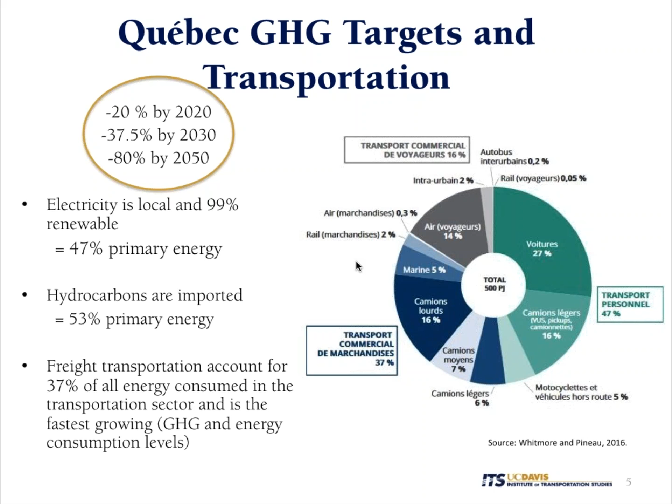So I will briefly give context for natural gas use in transportation, although Joan has done a really good job, so I'll go quick. Both Quebec and California participate in the Western Climate Initiative. Quebec has GHG target reductions in transportation: 20% by 2020, 37.5% by 2030, and 80% by 2050. Freight accounts for 37% of all energy consumed, and as is the case in California, it's one of the biggest growing sectors in terms of GHG emissions. So it makes sense that we try to target transportation, and one option is to use natural gas for vehicles.

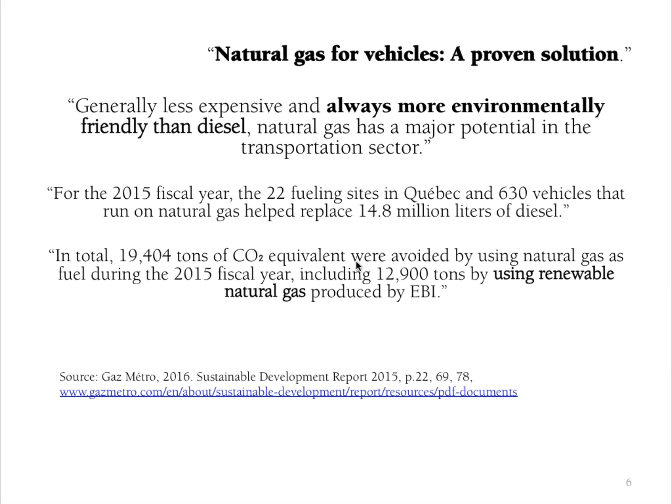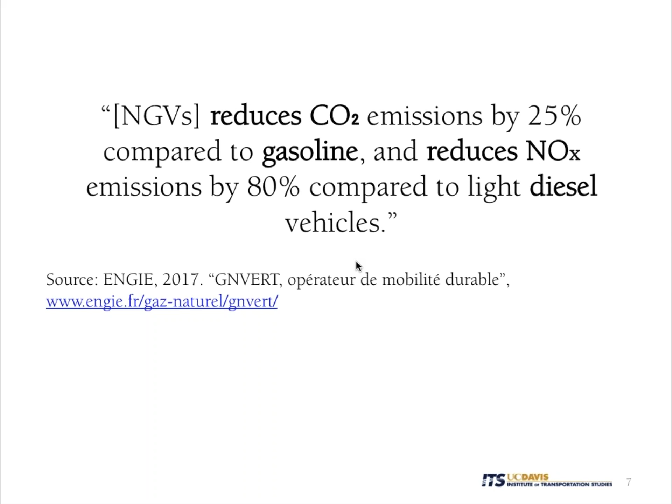I'm going to show some claims that say natural gas is the problem's solution, generally less expensive and always more environmentally friendly than diesel. This is from Gaz Métro's sustainability report, stating that 19,000 tons of CO2 equivalent have been avoided by switching to renewable natural gas. Another claim, this time by ENGIE, a freight operator, states that natural gas vehicles reduce CO2 emissions by 25% compared to gasoline, and reduce NOx emissions by 80% compared to light diesel vehicles. So a couple of things here.

Are we talking about what kind of pollutant here? Are we talking about criteria emissions or GHG emissions? Because they are different, right? Oftentimes natural gas vehicles are touted as near-zero emission vehicles. That's true, but it refers to criteria pollutants only. That means natural gas is indeed low in NOx and PM, and that's why the denomination of near-ZEV, but that refers to criteria pollutants, not GHG.

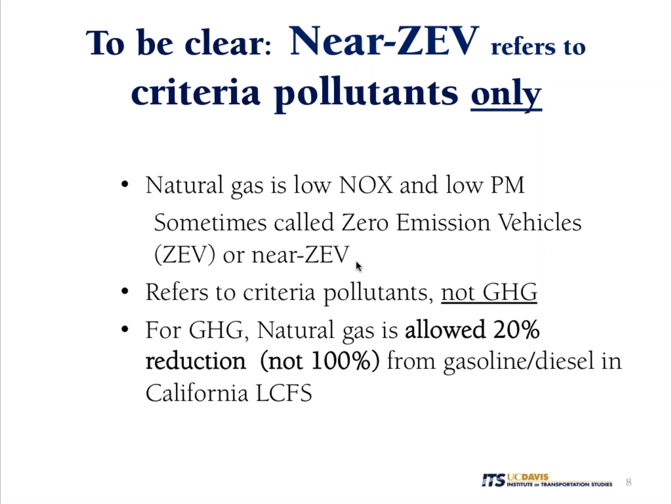Some claims, including LCFS credits in California — low carbon fuel standard credits — claim that natural gas can produce about a 20% reduction from gasoline and diesel. Not 100% reduction, so not a ZEV, but about 20%. That's what we're going to try to evaluate: how true are these claims.

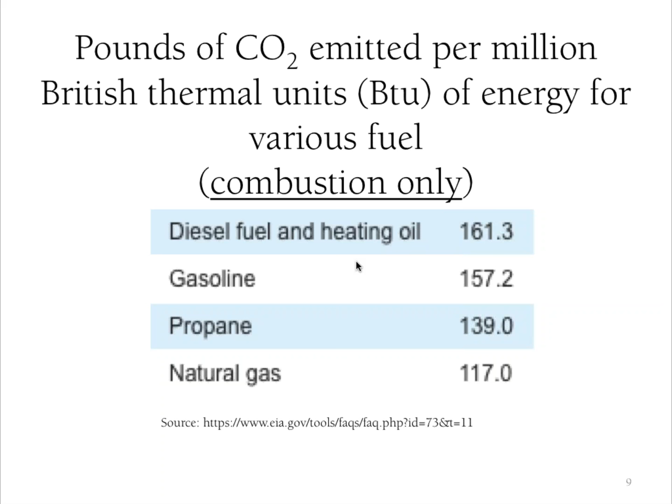When we're looking at emissions from transportation, we look at what's coming out of the engine, out of the vehicle — combustion emissions. Yes, natural gas emits less CO2 per energy produced than diesel, but it's a little more complicated than that. That would only be the emissions from the vehicle. When we're talking about fuel use, we want to see the big picture: what's the life cycle analysis, or what we call the well-to-wheels carbon intensity. The well-to-wheels is defined by each stage, from production of the fuel, refining it, putting it in the pump, then putting it in the vehicle and using it.

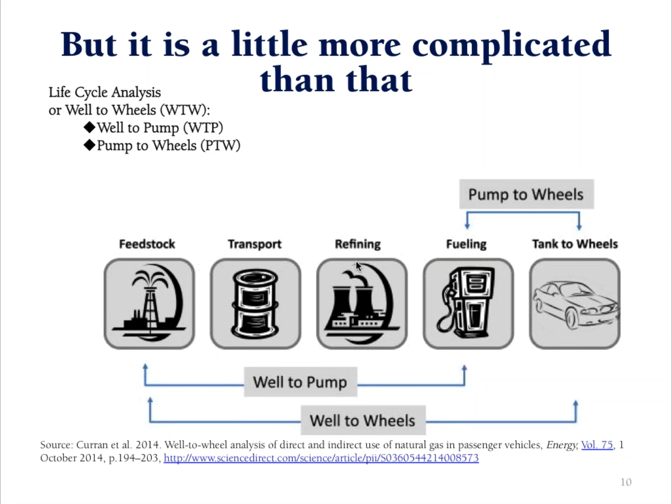We can typically divide the whole life cycle, or well-to-wheels, into the first part, the well-to-pump — sometimes called the fuel cycle — which is what it takes to produce and bring the fuel to the station. Then there's the pump-to-wheels, which is the use part, the end use. For now, I'm just going to focus on the upstream: the well-to-pump, upstream, or fuel cycle of methane, of natural gas, which requires that we look into an important issue — methane leakage.

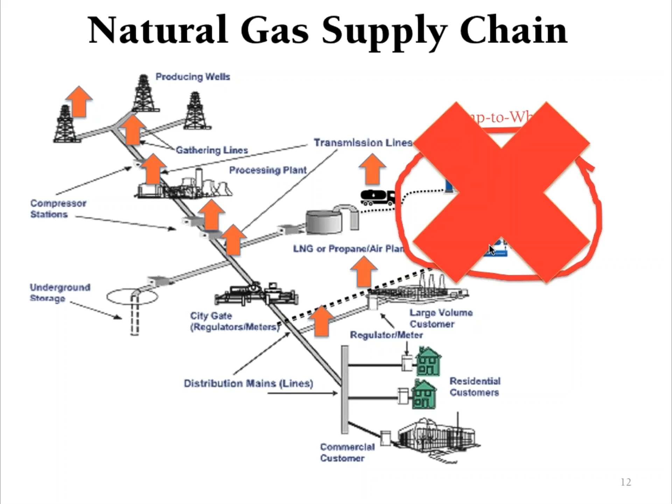So during production we have wells, gathering lines, processing plants, compressor stations and transmission. We have them in the distribution system, in the transport to the stations, and in the stations and vehicles. But I'm not talking about that right now, that's why I'm marking it. I'm talking about the upstream.

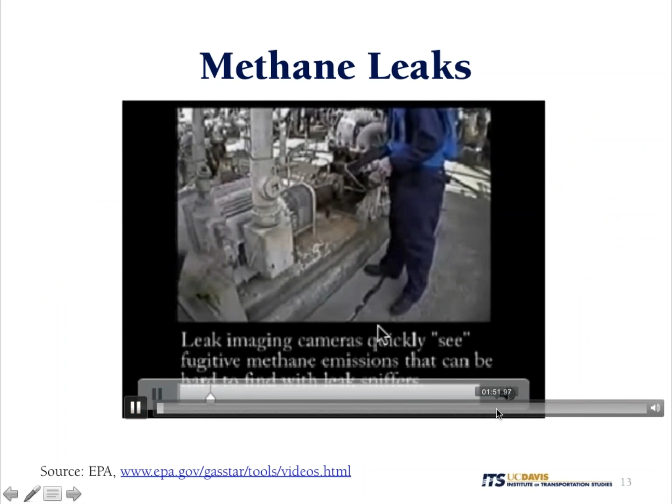I want to show you this video by the EPA looking at methane leaks in the upstream. This uses infrared cameras, and the quality isn't great, but you can see, for example, here marked in the circle, the part that looks normal in the regular camera, and then with an infrared camera you can see that there are leaks. That's how we see the leaks happening.

We have several examples here. We're looking at the joints, and pay attention to how this is a measurement - this is how EPA is measuring the leaks. More processing plant leaks.

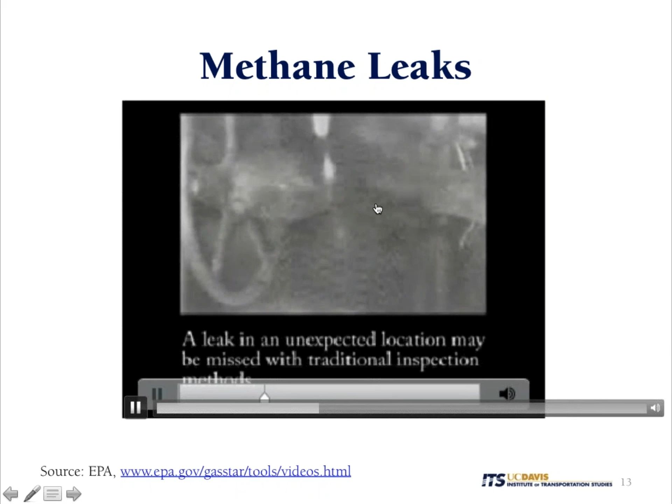We'll see leaks throughout the supply chain. Just bear with me a second. Hopefully you see the black fumes that are normally not visible to the naked eye, and that's happening here in the distribution system. You don't see anything here, and now you see it - that's the same thing with the infrared, right?

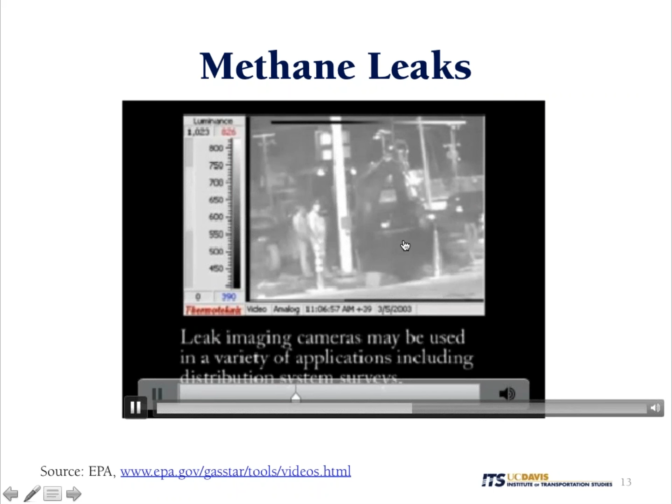So methane leakage is happening even though we don't see it. Another one - a manhole that's open, and then you see all the methane leaking. A road, a pipeline, maybe that's a repair, or we've seen that they leak.

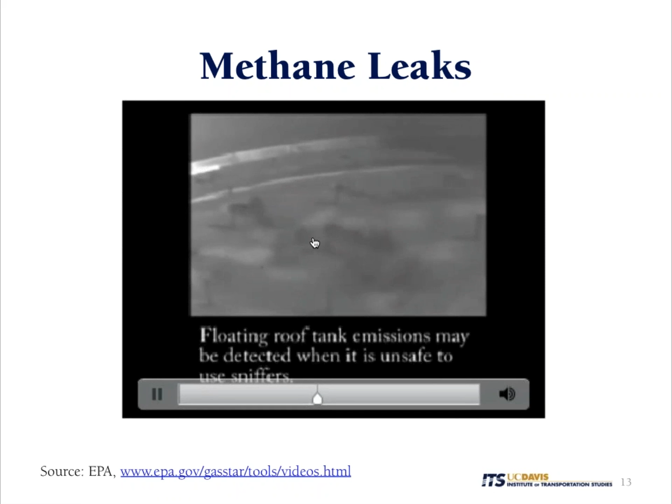This is probably a storage tank. I know it's hard to see, but you can see that there are these leaks coming from the little pipes. We'll see that there is leakage in the pipelines, and that's coming next.

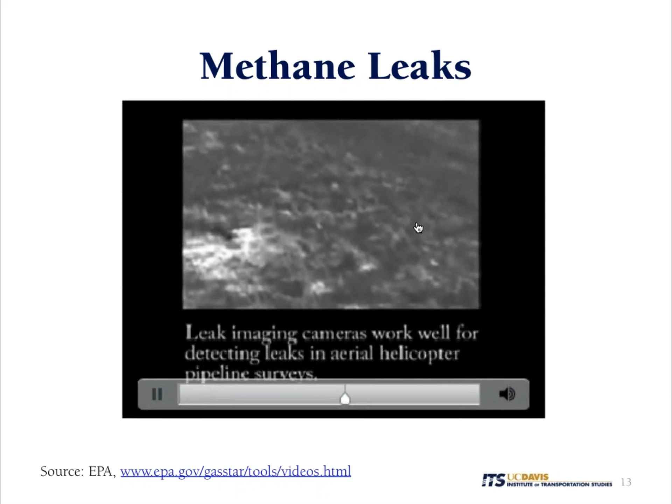This is going to be shown using aerial surveys - basically the same technology, but from the air. So this is pipelines that are leaking. A pipeline that's leaking. An oil production well is leaking too. And then more storage. Point is, there is leakage, even if we don't see it - but we do know it.

The EPA has been monitoring methane leakage in the natural gas and oil systems for a while now, measuring the leakage at each stage. They have come up with this number: overall the system leaks about 1.5% of what's produced.

So basically about 1.5% of the natural gas that we consume is leakage - it's leaking to the atmosphere. We're losing this to the atmosphere, and that's bad because methane is a powerful greenhouse gas. So we know that's not a great idea.

This is more or less how it's distributed: 0.2% happens during drilling and fracturing, 0.4% in production, 0.2% in processing, and 0.7% in the transportation and distribution system. End use, which in our case is transportation, is not included in the EPA inventory.

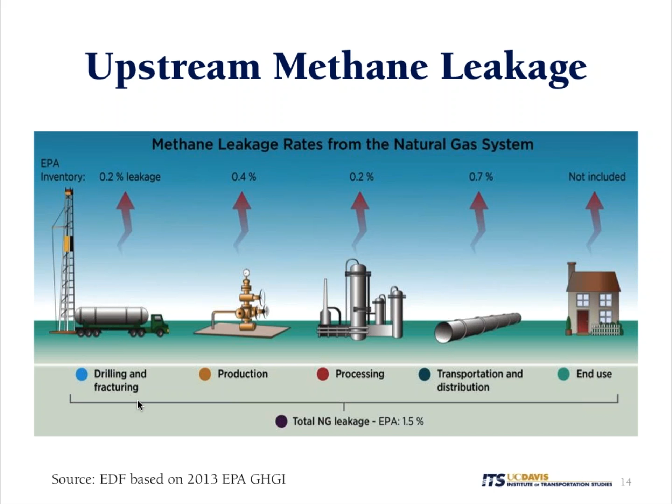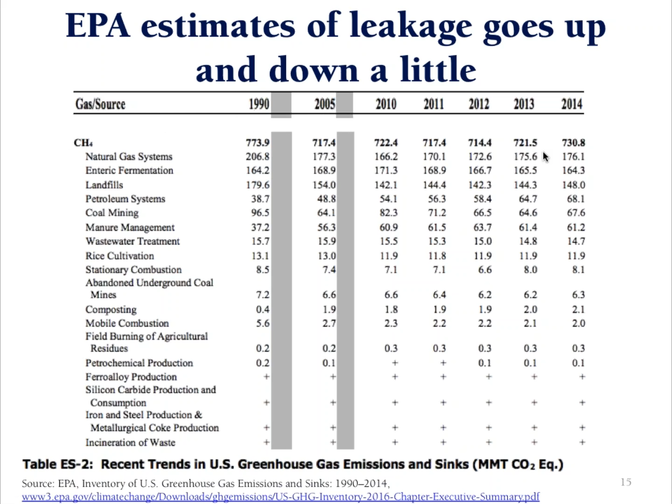EPA estimates of leakage go up and down a little depending on the year, and that has to do with new regulations coming into place and people being maybe a little cleaner, but it also has to do with the method. In this table, directly out of the greenhouse gas inventory by the EPA, if we look at the first line after methane (CH4), this is natural gas systems, and we can see it's been going down and then up a little bit. It varies a little, so there's some uncertainty in the actual quantity being emitted, but we can deal with it.

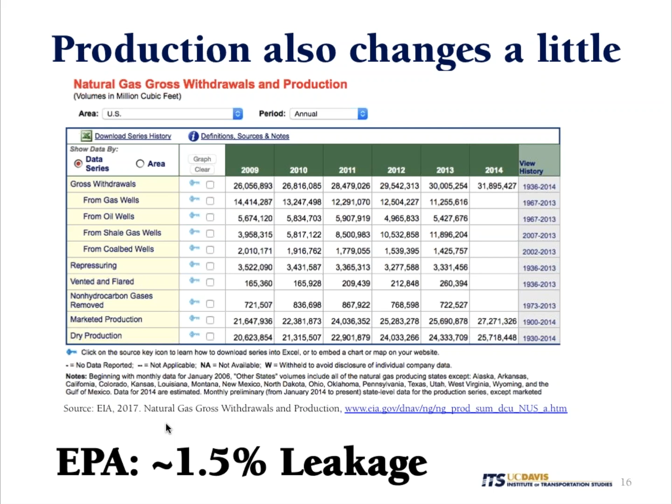Production of natural gas also changes a little over the years, so gross withdrawals from gas wells also change a bit. If you divide what we measure is being leaked into what's being produced, that's how we come up with this 1.5% leakage figure. Keep this number in mind because it will be the basis for a lot of my calculations.

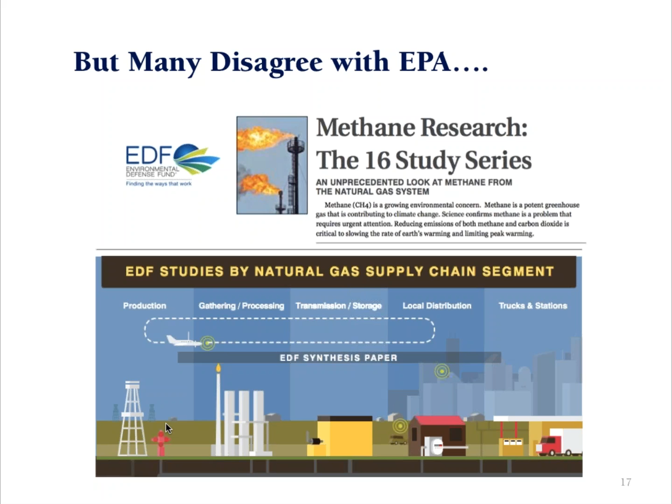However, many disagree with EPA. In the US, over the past four years or so, there has been an intense debate about whether EPA has accurate estimates for methane leakage. There have been at least 16 major studies by different universities and centers, all under the umbrella of the EDF, the Environmental Defense Fund, and their scientists, which have comprised the entire natural gas system.

Some people have looked at fields and natural gas production. Some others have looked at distribution systems, urban systems, transmission lines, storage, etc. So the entire system has been looked at, and the results have been that they found a range of estimates. So who is right? Again, a lot of uncertainty.

One main difference, besides the regionality, is that there are some regions where drillers seem to be leaking more than others, and that seems to be related to the fact that some states have better regulations about methane control. It's been shown that some companies are better than others, also maybe due to regulations or company culture. But I think the main difference between the studies is the methodology of how this methane has been estimated.

So EPA, if you remember in the video, there was this person with a machine taking a measurement of a specific device. So now you have an estimate, an emission factor from this device, and then you have an inventory of the number of devices you have like that. You multiply your emission factor by the number of devices, and that's your estimate. That's what we call bottom-up.

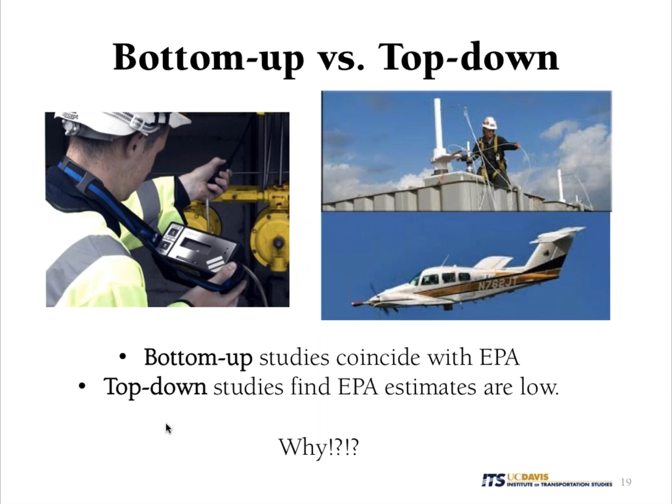So why is that? There's a few theories, a few reasons, I would say. One is that it looks like EPA might be missing a small number of super emitters.

In other words, in a bunch of studies it's been found that there are a few companies responsible for the majority of emissions, again reflecting company culture. Or in a transmission system, even belonging to the same company, or a distribution system belonging to the same company, some sites were responsible for the majority of the leaks.

So maybe EPA's sample of measurements is not looking at the entire population. And that can be explained, and I think it kind of makes sense, because the EPA is measuring this with some volunteer companies. So some people are volunteering their facilities for EPA to come and take measurements. I think you can expect that the best practitioners and best performers are going to be in the sample, not the bad performers. So that's one reason why we see more methane in the atmosphere than we would expect based on the EPA inventory.

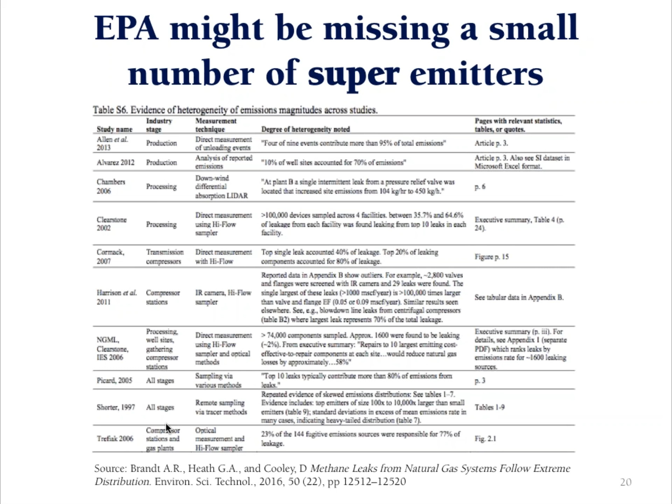Another reason is that we're not measuring, we don't know what's going on with abandoned wells. We don't even know where they are sometimes. We don't have a good record of all the wells that were drilled and operating, and maybe they've been closed, and there was no standard method of closing them. So these are also leaking.

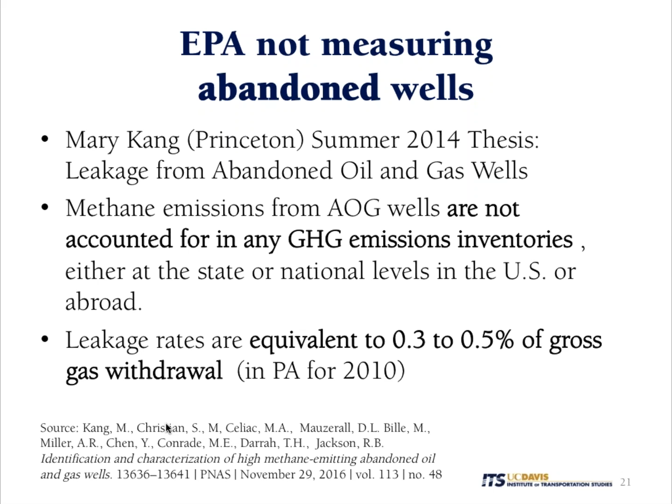Mary Kang from Princeton published a paper looking at the contribution of methane from abandoned wells in Pennsylvania, and she found that these abandoned wells might be contributing 0.3 to 0.5 percentage points. So...

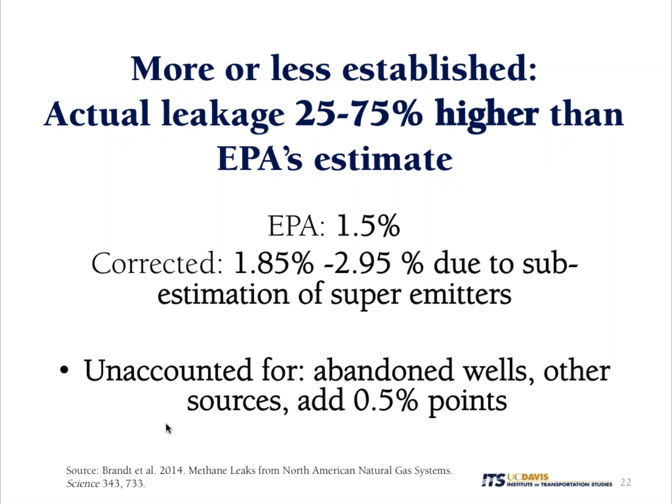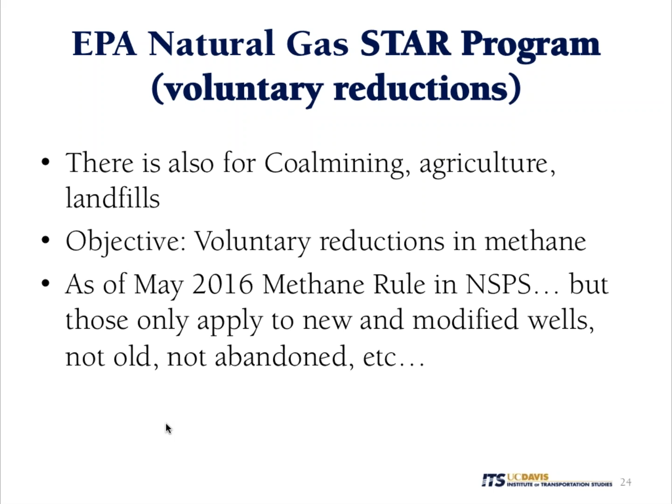I want to point out that there's been an effort to reduce upstream methane leakage. EPA has this voluntary program where people participate, called the Natural Gas STAR program. STAR programs also exist for coal mining, agriculture, and landfills, and this is basically EPA establishing where the leaks are, measuring how much they are, and then suggesting a series of measures you could take in order to reduce this leakage, like new technologies, etc.

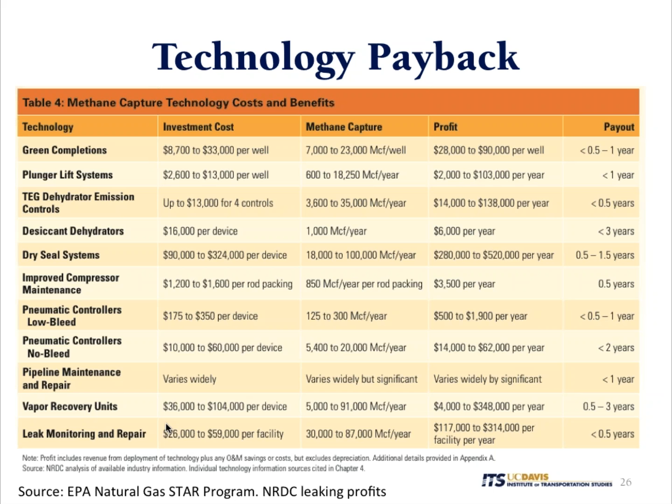And what's found is that most of these technologies have a payback period of less than 3 years, sometimes just a few months. So it's in the economic interest of companies to try to reduce their leakage by applying these things. So there's a little progress. I have to say this payback period is based on a time when natural gas was more expensive. Now with natural gas being so cheap, the benefits of not wasting it are somewhat reduced. But there's progress.

About 16% from 2015 to 2016, about 16% of the leakage was reduced, despite the fact that production increased by 35%. But the amount that we are not emitting with this program is still only a small percentage of what's being emitted.

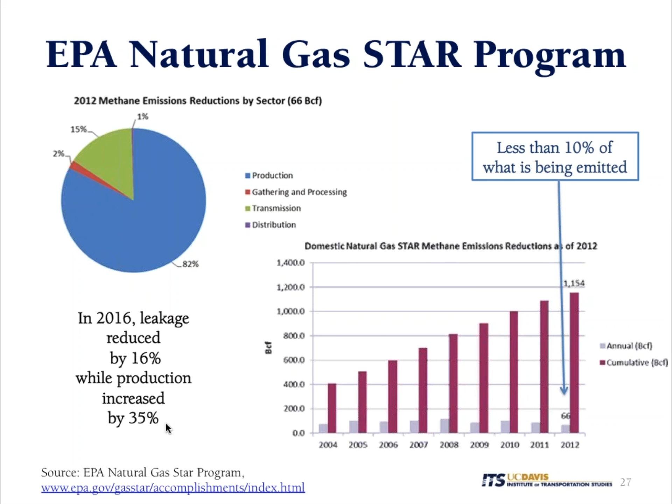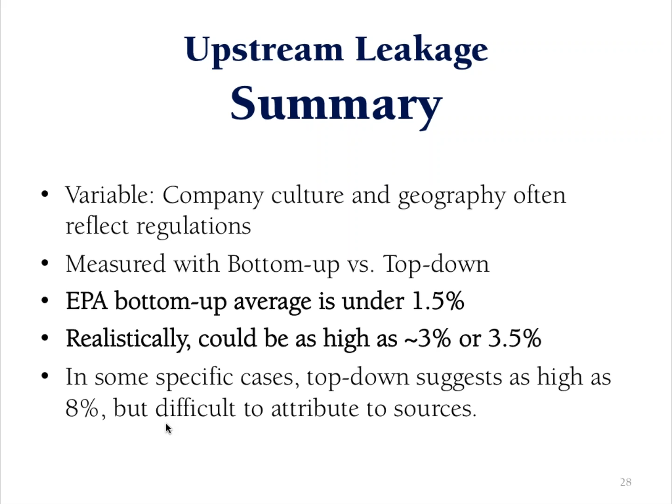So in summary, what I have explained about upstream leakage is that it's variable, depends on company culture and geography, which often reflect regulations. It depends on how you measure it. The numbers, 1.5%, it could be up to 3%, 3.5%. In some specific cases, some studies have found as high as 8%, but that's been difficult to attribute to sources. So we don't know whether it's coming from a natural gas well, from an oil well, from an abandoned well, so there's uncertainty in there.

My way to deal with uncertainty in this case is I'll just test different scenarios for leakage. I'll do the baseline, and that would be at 1.5%. I test a zero leakage scenario, and then I can test higher up to 10%, but that's not really interesting. And I will get to that in a minute.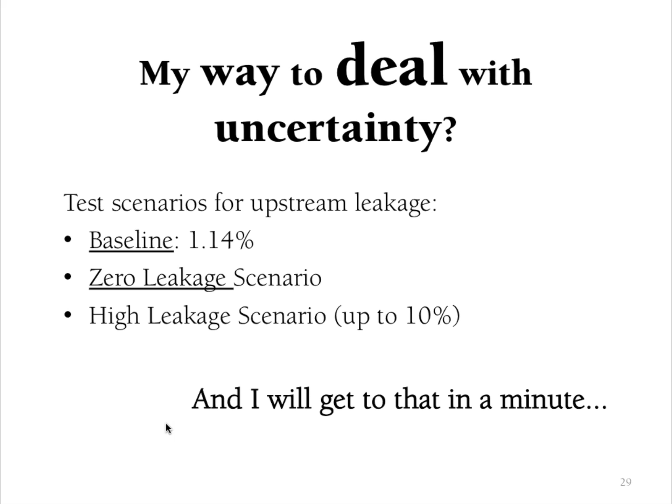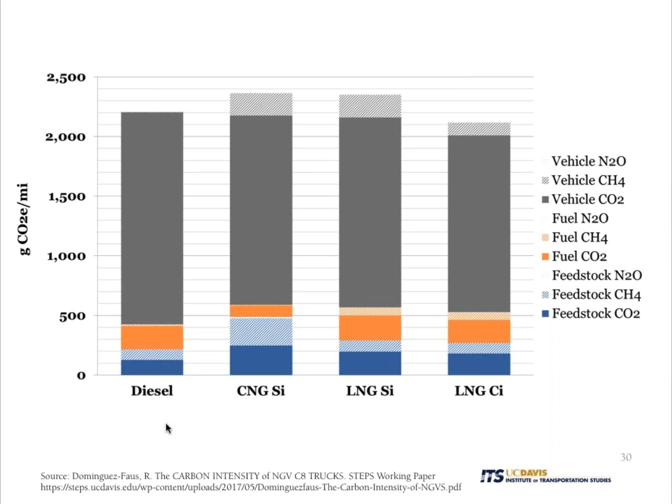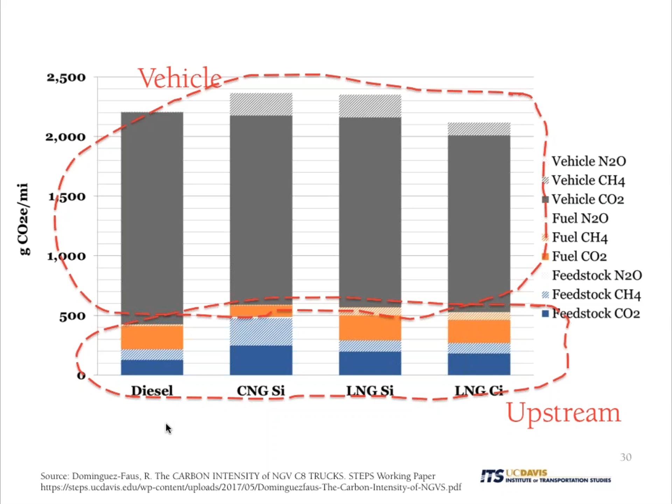But now I want you to see this. This is part of my results, we're not talking about the results right now. What I want you to see is the carbon intensity of diesel and 3 different options for natural gas. What I want you to see is that the gray area, which is what's happening in the vehicle, the emissions that come from the vehicle, is a major part in the overall carbon intensity compared to what's happening upstream. So even though yes, we want to reduce methane leakage, and it's important to reduce methane leakage, and try to be very accurate in our estimates of what's going on upstream, I want you to understand that the biggest contribution to carbon emissions happens in the vehicle. So that must not be overlooked.

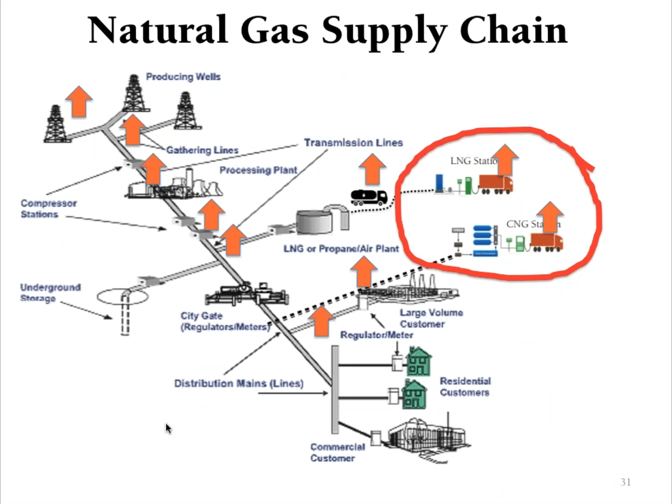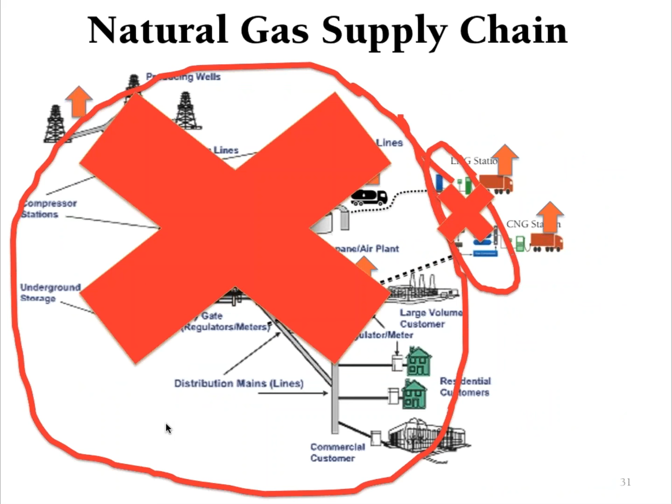So remember how I was not looking at what happens in the vehicle? So now I'm going to talk about what's happening in the vehicle, right? So no upstream, and we'll look at the pump to wheels, although I have to say we don't have a lot of information about the pump. So it will be mostly just about the vehicle. Okay?

There is methane leaking from the natural gas trucks, and that's not happening as much in diesel trucks. So that is a little bit contested or contending, but again, there's uncertainty in data. I have to say I'm using vehicle data that's provided by Westport. Westport is one of our consortium members, and it's a lovely relationship, I love them. So these might need to get updated - haven't talked to them in a while, but this is what they provided a couple of years ago when I did this study. So one thing is to see that while there is basically no methane leakage in the diesel trucks, there is methane leakage in the natural gas trucks.

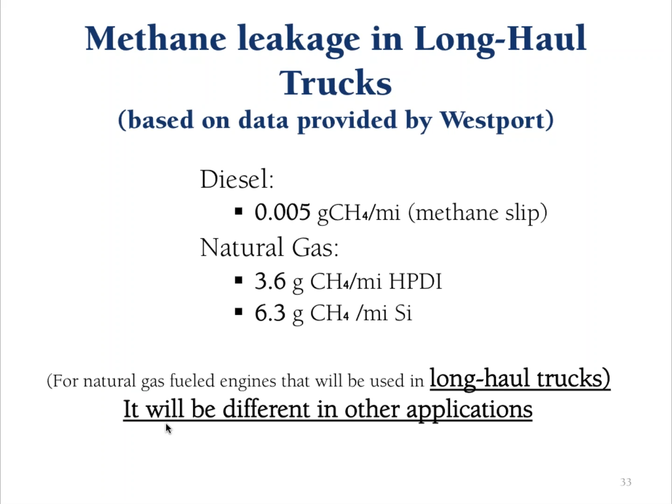And it depends on the engine. There's different types of engines, and then there's different types of applications of this engine. So it's very specific to the application. Just to note that I'm doing long-haul trucks, so these numbers apply to long-haul trucks. Other applications will have another emission profile because they will have different drive cycles, and that affects the emissions. We're not going to start talking about emissions and drive cycles, but we'll just state that that's the case.

Other studies, and I don't know what the claims we had at the beginning of the presentation are using, but I know the California Air Resources Board, when using the numbers for natural gas, is assuming it's being used in buses and taxis. While my study will be using it in long-haul trucks. That is important because of the different drive cycles of these applications that affect the emissions and the efficiencies. And it's important because depending on which fuel it's substituting, whether it is gasoline or diesel, then we'll notice that these differences are even more important.

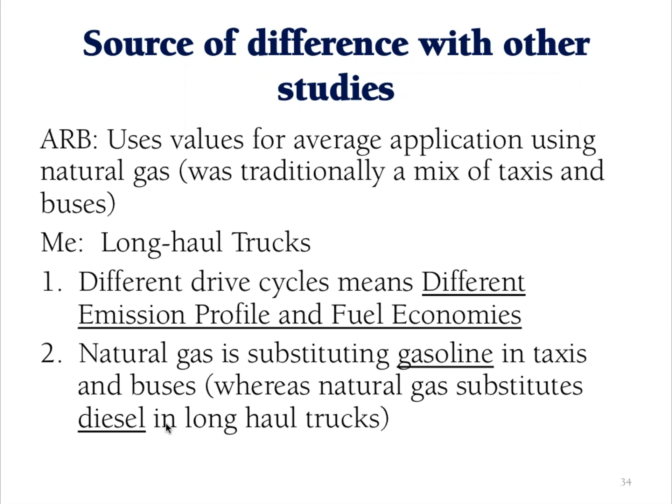So why does it matter which fuel it substitutes? It's really related to the efficiency of the combustion process. It's not so much the fuel, it's the engine that will be used to combust this fuel. Diesel uses compression ignition engines with an efficiency of 55% average, just talking about an average here. Gasoline and natural gas both use spark ignition engines. In general, spark ignition engines are about 10% less efficient than compression ignition engines.

So when you are comparing natural gas to diesel, even though natural gas might be a lower carbon fuel, because you're going to have to use a less efficient engine and burn more of the fuel, you might be emitting more carbon in the end.

For gasoline, because both gasoline and natural gas use spark ignition, there is no fuel economy penalty. So in taxis and buses that use gasoline, there's no difference in efficiency. In long-haul trucks, there's a 10% efficiency loss when switching to natural gas, and that's going to be very important.

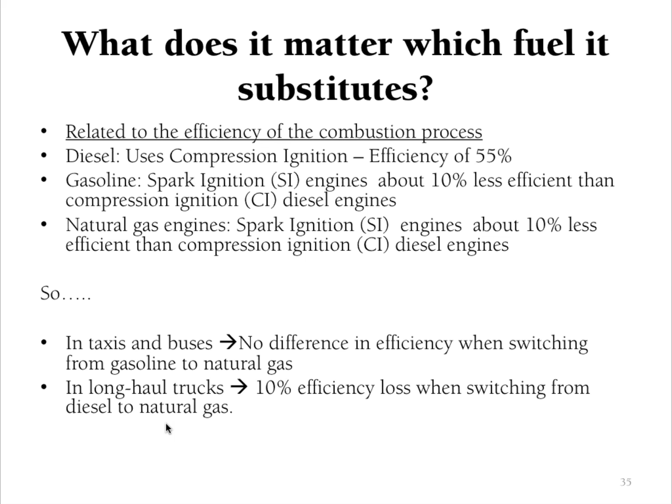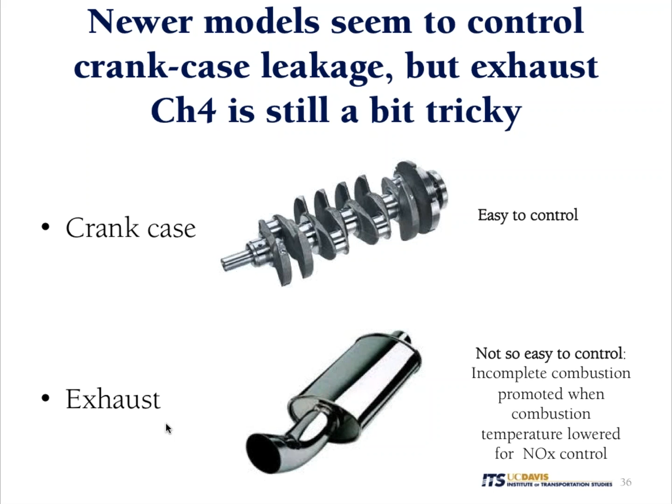Newer models seem to control crankcase leakage, but exhaust CH4 is still a bit tricky. I'm not going to talk too much about that, but reducing methane leakage in the vehicle is going to be important, and I think it's possible to do. It looks like about half of the current leakage in the vehicle can be controlled. The other half is a little difficult, so I don't think we'll have zero methane leakage from the vehicle.

Westport designs the HPDI dual fuel engine, which uses 90% natural gas but starts with diesel. So it can start with compression ignition and therefore maintain the high efficiency levels of a diesel truck. The most common though is the spark ignition efficiency. I'll try both in my model, to see how these differences in efficiency of the truck will impact the results.

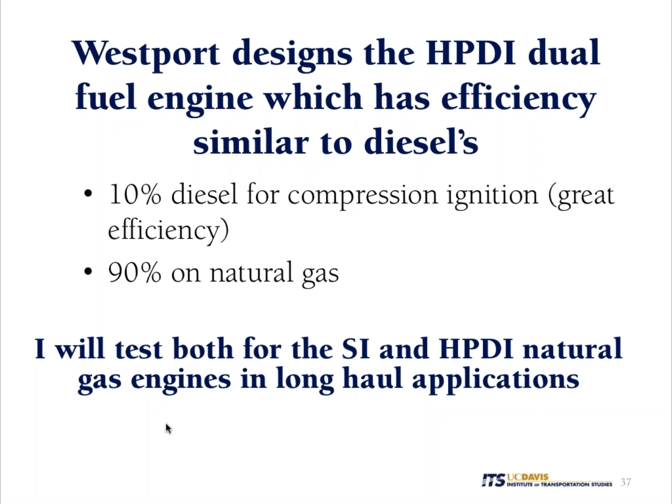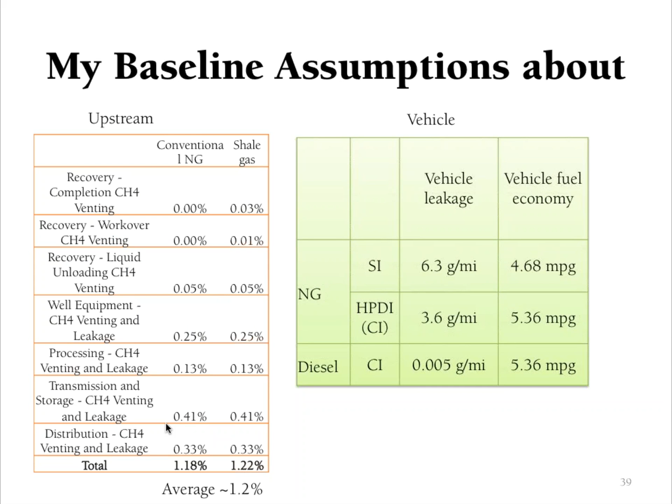So now I talked about the methane leakage upstream, and the methane leakage in the vehicle, and I'm going to add all this to my model, which is a GREET model, and calculate the well-to-wheel carbon intensity. Just a reminder of baseline assumptions, because I'm going to do a baseline scenario and then modify scenarios to see the impact of the different variables.

This is the results, the figure I showed you, but now we're going to pay attention to the results. So the left column is diesel, and the right three columns are natural gas in the form of CNG used in a spark ignition engine, natural gas in the form of LNG used in a spark ignition engine, and natural gas in the form of LNG used in a compression ignition engine.

What we find is that if we look at the two in the middle, same engine but natural gas with different storage, there's not a big difference in overall emissions, but both produce an increment of carbon emissions with respect to diesel: 6% in the case of CNG and 4% in the case of LNG.

Now, the other thing we can see here is that the gray color is what happens in the vehicle. The solid is CO2 emissions, the stripes are methane emissions, so you can see how much in the vehicle is contributed by methane and how much by CO2. The same applies to the fuel cycle or upstream, shown in yellow, orange and blue—the solid again is CO2 emissions, and the stripes are what's contributed by methane leakage.

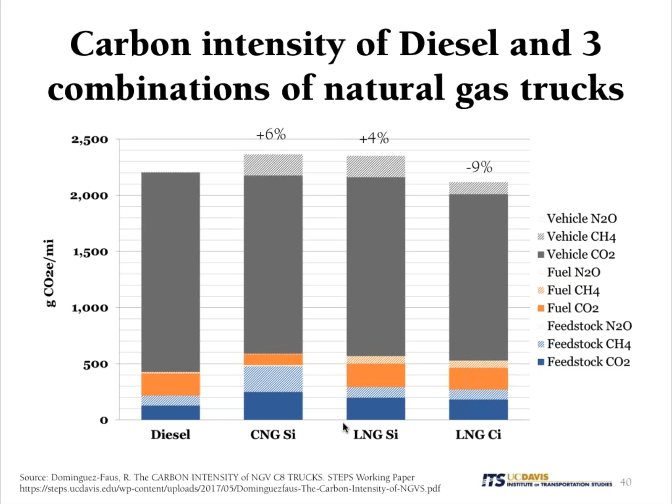I've been discussing this with a lot of people in California, because as you know, we have big incentives for natural gas vehicles, and that was not very well received.

Good thing for me, I guess, is other studies have found similar estimates. The estimates vary, there's uncertainty, so I won't say my numbers are perfectly accurate. There's variability, so estimates can move up and down a little bit. But I'd say other studies in the US focusing on long-haul trucks have found that natural gas does indeed increase emissions by a little bit.

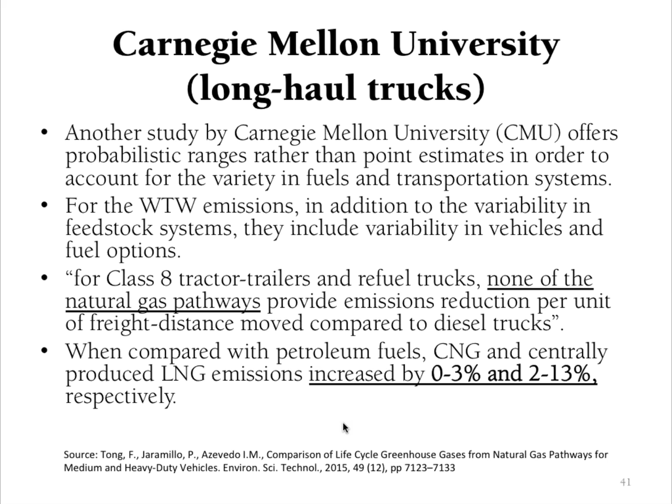That's the case of Carnegie Mellon University, a really important center for life cycle analysis. Columbia University with the EDF used a different approach, but basically found that natural gas leads to damage to the climate for several decades, and it's only after 72 or 90 years, for different kinds of storage, that you get any benefit.

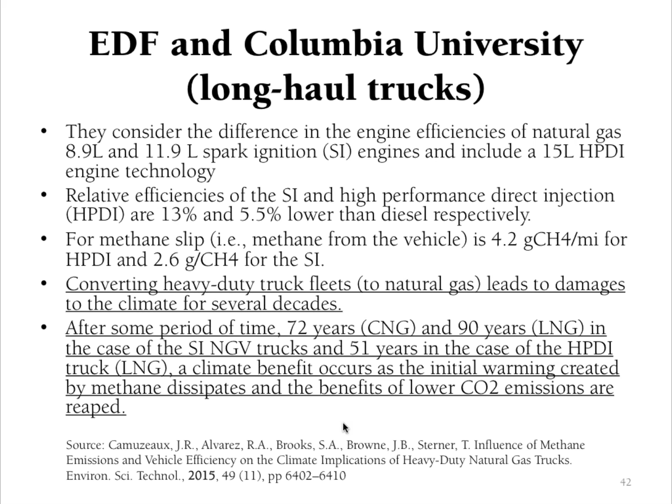The LCFS, though, says there's a reduction, and that's again because the application is different. Buses and taxis use spark ignition engines like gasoline engines, so there's no fuel penalty there.

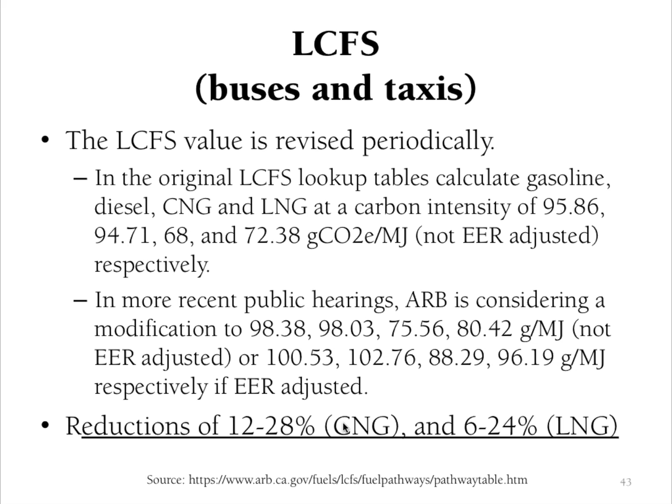So there's variability and uncertainty. Why are these all different? Which variables are more important? In the end, we can argue forever how much leakage is actually happening upstream versus in the vehicle. I have to deal with this uncertainty somehow, and the way we do it in LCA and modeling in general is we try to test the sensitivities.

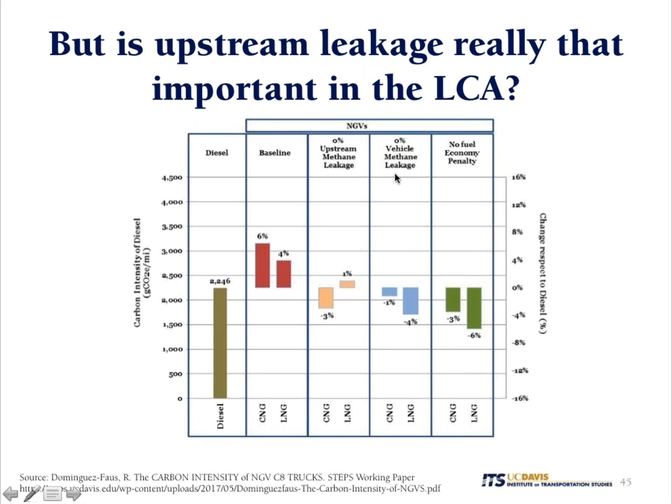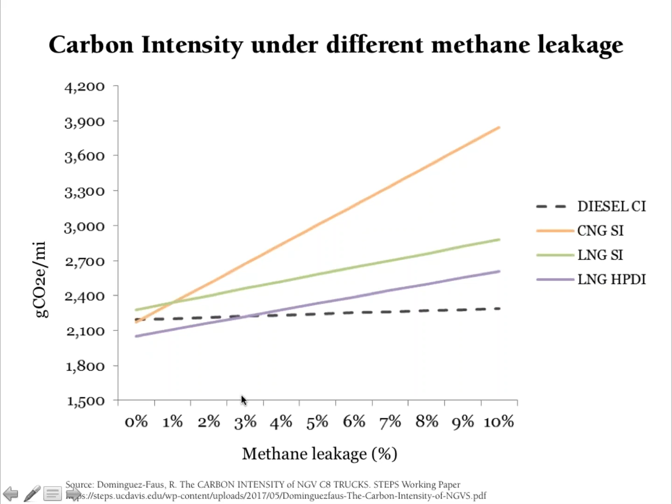Another thing we see here is that for any given storage type - just comparing LNG to LNG - only the compression ignition engine, the one with high efficiency, is actually below the diesel line at some point. With spark ignition, leakage has to be basically zero or under. With compression ignition, leakage can be up to 3% to break even - and that's just to break even, not to produce any benefit.

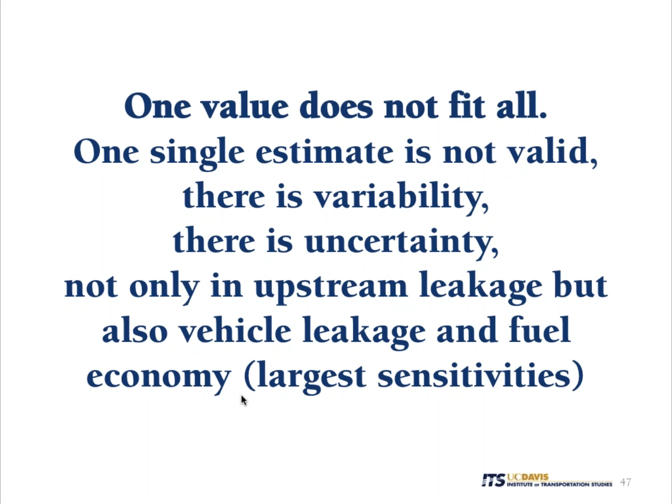The conclusion is that there is variability besides uncertainty. One value does not fit all. One single estimate is not valid, not only upstream but also in vehicle leakage and fuel economy, which I've noticed have larger sensitivities than normally overlooked. A lot of focus is on the upstream, and that's important, but what happens in the vehicle is also important.

I am not saying that natural gas cannot provide GHG reductions. What I am saying is that it is not always the case. Upstream leakage is important, but so is what happens in the vehicle.

The vehicle specs will depend on the application, and the fuel it substitutes. It's not the same whether it's bus, truck, or marine - and I know there's interest in marine too, and I think it's actually going to be very beneficial in marine. There are ways to lower the carbon intensity: reduce upstream methane leakage, reduce vehicle leakage, increase fuel economy.

However, using any of these, reductions will be modest. It's definitely not a near-ZEV in terms of GHG. Near-ZEV applies to other kinds of pollutants, not carbon pollutants.

There is a possibility of lowering the carbon intensity of natural gas considerably by blending it with hydrogen or renewable natural gas. We have produced another study on the potential of renewable gas in the state of California. I don't think I have time to discuss that, but maybe we can discuss it in a webinar.

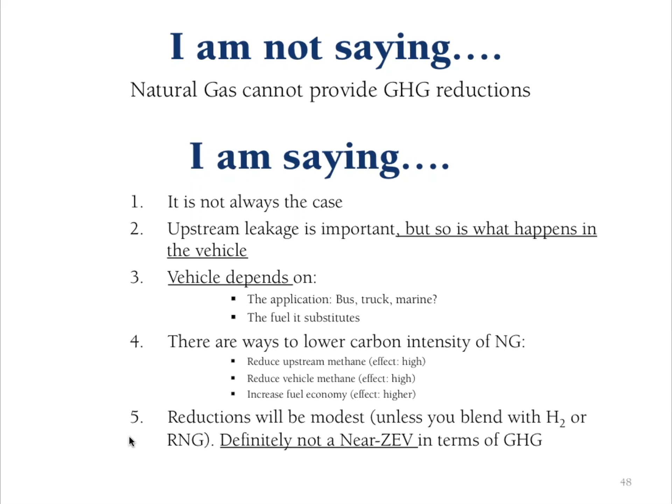Most of the RNG study, as well as the fossil natural gas study reports, are on our website. Here are the links, and with that, I would like to thank you for your attention, and I'm open to questions.